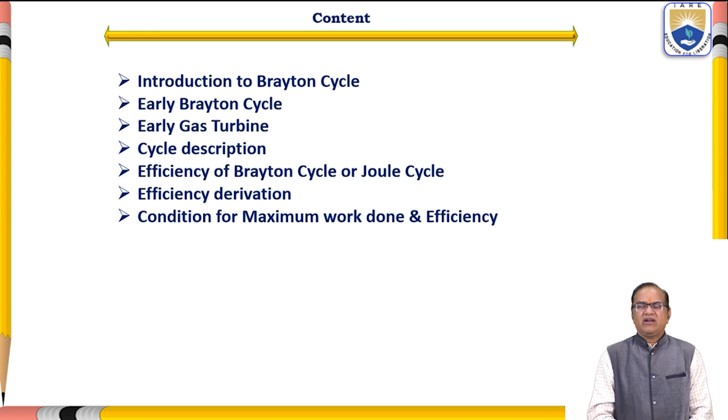Today I will be discussing introduction to Brayton cycle, early Brayton cycle, early gas turbine cycle description, efficiency of the Brayton cycle or the Joule cycle, efficiency derivation, condition for maximum work done, and the efficiency. This I am going to take.

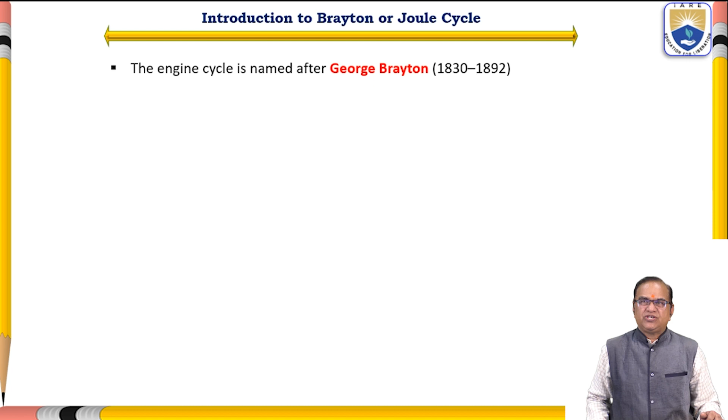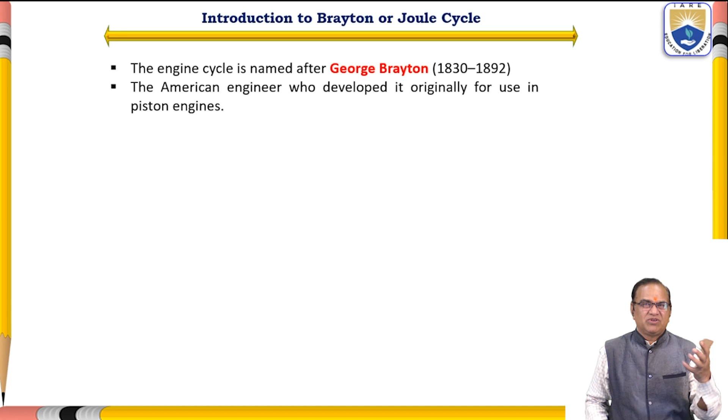In the introduction part, this Brayton cycle is also known as the Joule cycle. The engine cycle is named after George Brayton, whose period was from 1830 to 1892. Brayton was an American engineer who developed it originally for use in piston engines. He made this engine for the piston engine, but afterward it was used for the gas turbine engine because in the piston engine it was not very much of a success.

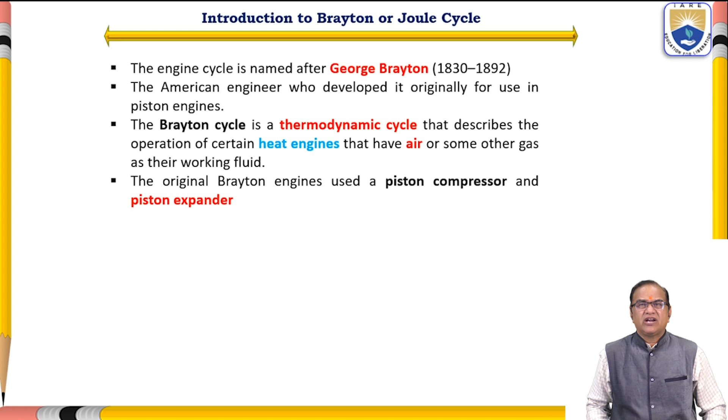The Brayton cycle is a thermodynamic cycle that describes the operation of certain heat engines that have air or some other gas as their working fluid. So we can use air or some other gases as a working fluid inside the piston and cylinder. The original Brayton cycle engines used a piston compressor and piston expander, so we use a separate compressor piston and cylinder, and a separate expander piston. Modern gas turbine engines and air breathing jet engines also follow the Brayton cycle.

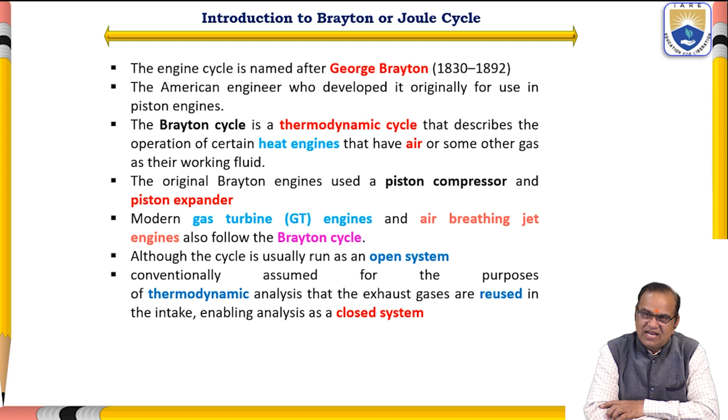We will see in the next slide how the historical development of the gas turbine took place. After Brayton's development of the piston engine, this same cycle was used for the power cycle of power generation, electrical power generation, for turbine engines, for aircraft gas turbine engines, and so on. Although the cycle is usually run as an open system, it is conventionally assumed for the purpose of thermodynamic analysis that the exhaust gases are reused in the intake, enabling analysis as a closed system. So we assume that whatever gases come out after the turbine are again used as input, and so we assume it is a closed cycle. However, in real practice, it is an open cycle.

So here are the early Brayton engines, which were developed by Brayton on these principles. Here you can see the compression system is different, and this is the expander. This is the expander, and this is the compression.

So in this 1872 Brayton gas engine, it is called the Brayton gas engine. Then the Brayton walking beam engine, in 1872 another engine was developed. Brayton engine in 1875, Brayton ready motor it is called. Then Brayton double acting constant pressure engine, all the parts here, how this engine was developed and all the parts of the engine were shown, and it was developed in 1877.

Now in 1889, Brayton 4-stroke air blast engine. Here the air was blasted, with high compressed air used, in 1889. And the next year, the Brayton 4-stroke air blast engine was developed in 1890.

So these are the few piston engines which were developed on the principles of the Brayton engine, and they were not very much successful in automobiles because their size is very big. You can see very big wheels here, all these things, but it can be used for power generation and other stationary work. This I have taken from this reference, from the Wikipedia page of the Brayton cycle.

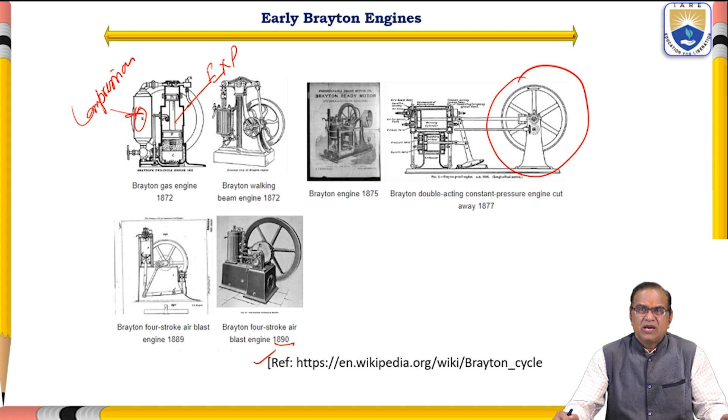Now I will go for the next topic, which is early gas turbine history. This history tells how the gas turbines were developed and how the Brayton cycle was used for modern gas turbine engines.

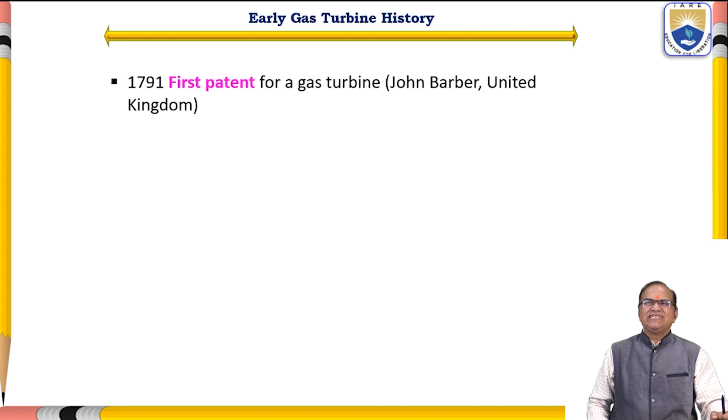So the first patent was filed by John Barber from UK in 1791, the first gas turbine patent. Then in 1904, an unsuccessful gas turbine project by Franz Stolze in Berlin, Germany, made the first axial compressor. It was unsuccessful, but he made the first prototype of an axial flow compressor.

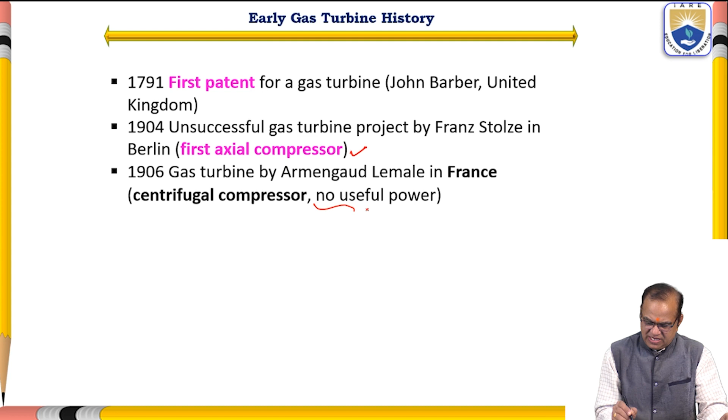Then another type of compressor called the centrifugal compressor. In 1906, a gas turbine was made by Armengaud Lemale in France, using a centrifugal compressor, but no useful power. That was the basic idea, but we could not get useful power in 1906.

Then in 1910, the first gas turbine featuring intermittent combustion, so first gas turbine with intermittent combustion, it was not constant combustion. The person who developed this is Holzwarth, 150 kilowatt constant volume combustion, like Otto combustion, a constant volume combustion was done.

Then in 1923, the first exhaust gas turbochargers were used to increase the power of the diesel engine. A turbocharger is like a turbo engine or gas turbine engine, used not as a separate engine but to increase the efficiency or power of the diesel engine. At high altitude or low density zones we can use this turbocharger, and these turbochargers are nowadays used in costly cars operating at high altitude in India, like Ladakh, Arunachal Pradesh, Jammu Kashmir, and other hilly areas where the altitude is high. To operate vehicles there, we need the turbocharger, which compresses the air before entry into the combustion chamber. That was the purpose of this.

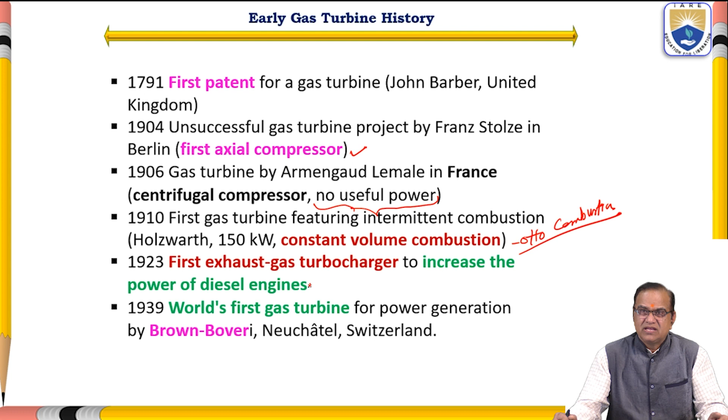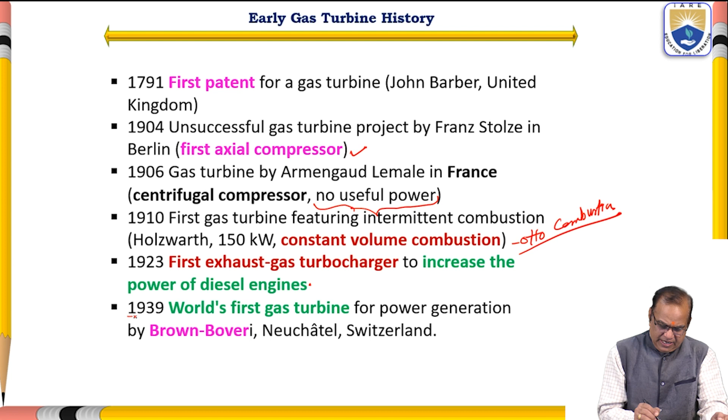Finally, in 1939, the world's first gas turbine for power generation was made by Brown Boveri of Switzerland, in Neuchâtel, Switzerland. This engine was developed in 1939.

Now I will discuss the Brayton cycle description: what are the parts, what are the components, and how this cycle was developed. So here we have first the adiabatic process. The compression is adiabatic, and this adiabatic is also reversible adiabatic, so it is called isentropic process. Next is the isobaric process, so this compression is an isentropic process.

Heat addition is done at isobaric conditions, like in your diesel engine. So at constant pressure we give the fuel and burn it. Heat addition means adding fuel which burns, and after burning the fuel you will get heat addition in the system.

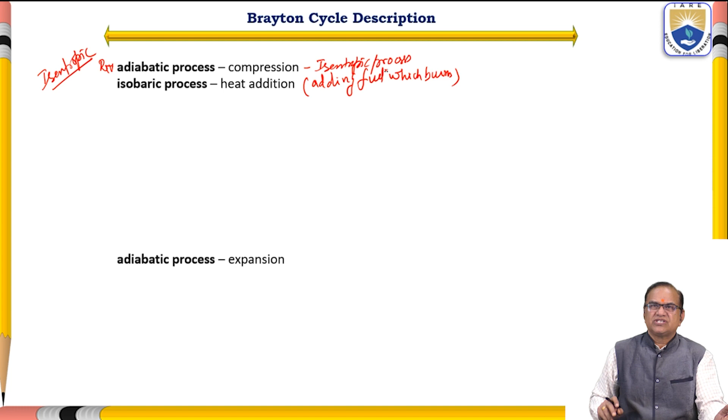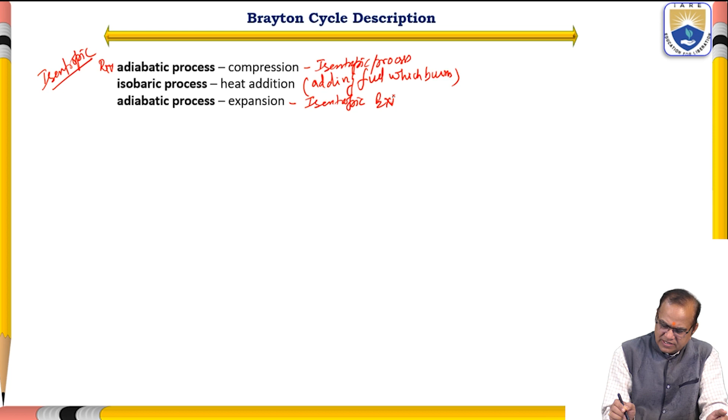Then we have the adiabatic process, that is expansion. This expansion is also isentropic, meaning it is a reversible adiabatic process, not exactly adiabatic, but reversible adiabatic. So expansion of the gases is where work is done, work is produced in this process, while in compression work is absorbed. So in the compression process, work is given, and in the expansion process, work is obtained. That is the difference between these two processes.

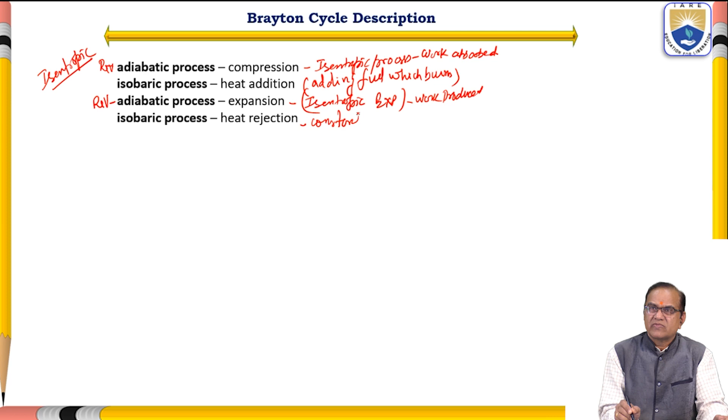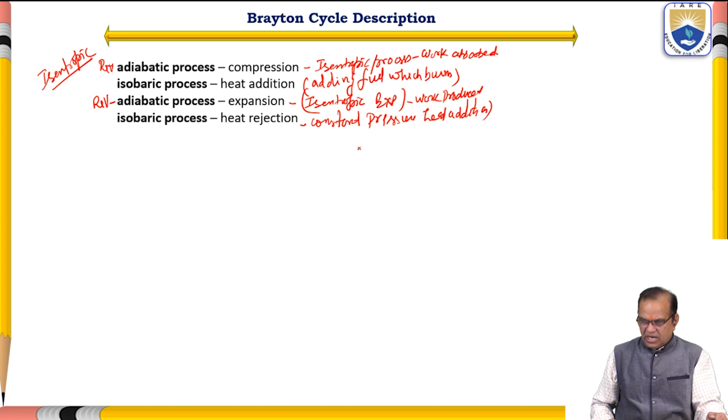And the heat rejection here is isobaric heat rejection, meaning at constant pressure, heat addition is given. Now we have here the diagram. First I will explain the components of the Brayton cycle, and it is a gas turbine engine, so these are the gas turbine engine parts.

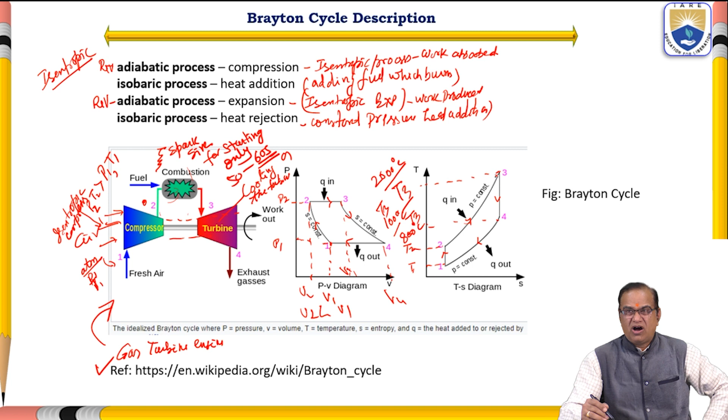So half of this is further lost in heat rejection. Normally in aircraft, this T4 may be 450 to 500 degrees centigrade. It is called the tailpipe temperature, and it has to be maintained within 450 to 500 degrees centigrade. It means at 450 degrees centigrade, the gases are leaving the system. So this point should be this much.

So from 2000 degrees centigrade here to 500 degrees centigrade, 1500 degrees centigrade is used. So the more you have of this value, the more work you will get, because we know the work output is equal to MCp times T3 minus T4. So the less this is and the more this is, the more work output you will get.

But we cannot make T3 as per our choice, because the material is going to fail. So we can reduce this T4 instead. How much are you able to reduce? If in place of 500, you can make it 200 degrees centigrade, then net here I am going to get 1800 degrees centigrade. So 1800 centigrade is used for the development of work.

So these temperatures are very, very important, and we can do some research work on how we can increase this T3 and how we can decrease the T4. As much as you are able to decrease T4, that much efficiency of the engine you are going to get. What are the methods we can use? How can we measure this?

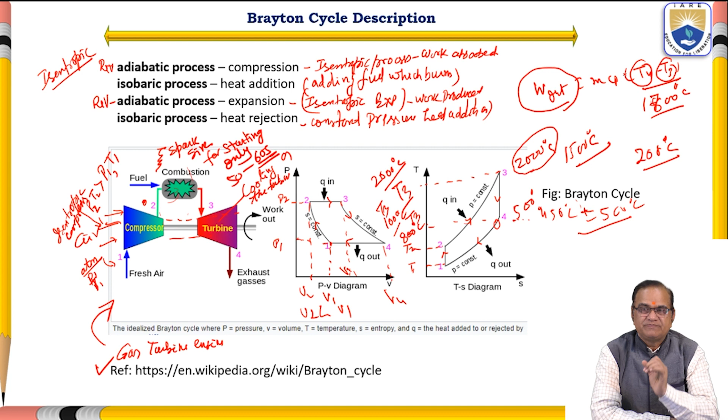Now I will discuss the efficiency of a Brayton or Joule cycle. In a piston engine, an instant high pressure and temperature is observed post ignition.

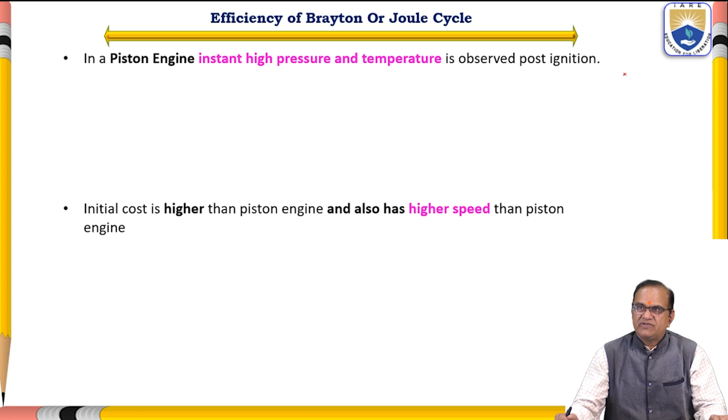In a GT engine, continuous high pressure and temperature persist. This is the difference compared to the piston engine, which has 4 strokes. Out of those 4 strokes, only in 1 stroke is heat added, and only in 1 stroke do you get the power stroke. Out of 4, only 1 takes part in power generation.

But in the gas turbine, it is a continuous process. It doesn't go like this, like this - it is just rotating. So any rotating engine gives a continuous process, and in that continuous process, continuous heat is present. In the piston engine, out of 4 strokes, only once do you get heat, and the remaining 3 are just cooling, so you can work nicely with high temperature. But in the turbine, it is not possible.

So for the same temperature as a piston engine burning inside the combustion chamber, we cannot use the same materials for our turbines, because turbines are always under the same pressure and the rotation is very high. So centrifugal forces and different types of forces are acting, and the material will melt very fast because a continuous sustained temperature is present.

This cycle represents a steady state flow process or a control volume process. So in this turbine, or in the Brayton cycle, it is a steady state flow process, not a control mass system - a control volume system is considered.

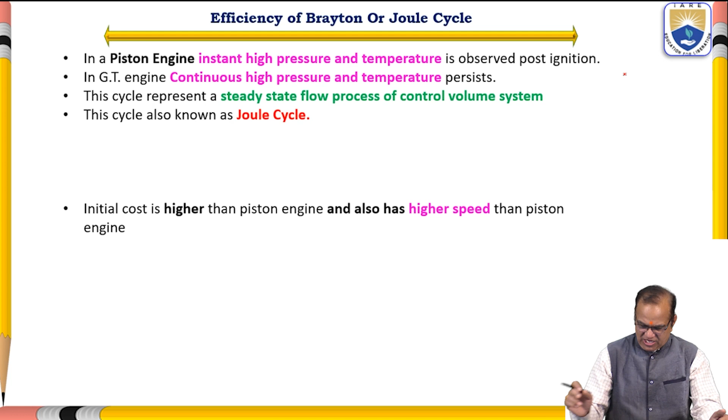This cycle is also known as the Joule cycle, and the practical application is in the gas turbine engine, or GT engine. Mostly these are external combustion engines. External combustion engines are only for power plants, not for aircraft.

For aircraft, we have the internal combustion engine, so it is not for everything. Only for power plants do we use the external combustion engine, where we can burn anything and the burned gases are used inside the turbine. In this, the heat source is outside the combustion cycle - only for the power plant, not for all. In aircraft, we don't use external combustion; it is an internal combustion engine.

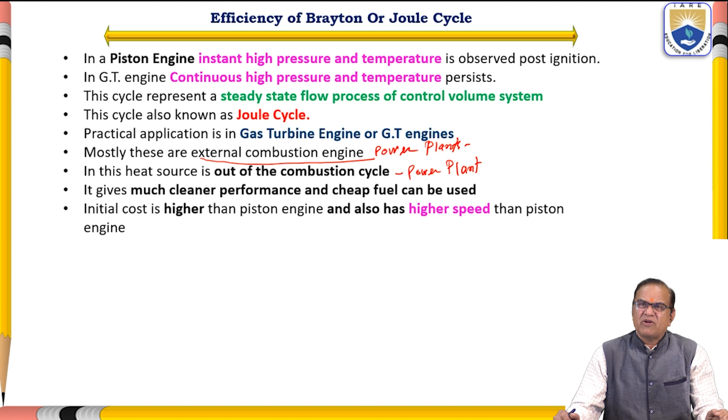It gives much cleaner performance and cheap fuel can be used. Much better performance, and the atmosphere also stays very clean. Burnt gases released are very less, and any cheap fuel can be used.

Like in aircraft, we use ATF - aviation turbine fuel, kerosene. This kerosene is used. Kerosene is low cost compared to petrol and others - the cost of kerosene is sufficiently low.

Initial cost is higher than the piston engine and it also has higher speed than the piston engine. So the initial cost of this gas turbine engine is much higher than the piston engine, and also the speed of these engines is very high. So it is not suitable - it is used for ships and aircraft, but not for ground vehicles due to its high speed. As of now, we are not using it for ground vehicles.

But in the near future, you will see that gas turbines are also used for ground vehicles, as and when the roads are built in a nice way. And from a long time, we have been using them in ships and aircraft. Most ships are operated by turbo engines.

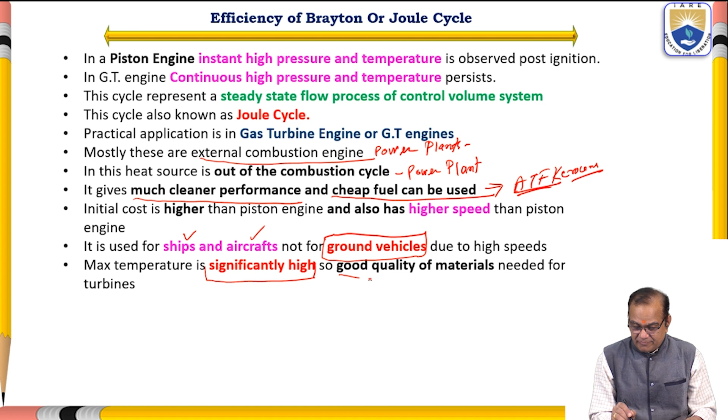Maximum temperature is significantly high - this is a disadvantage because the maximum temperature is very high, so good quality materials are needed, very high quality materials. Normal steel will immediately melt at 1300, 1400 degrees centigrade, but the temperature goes to 1800, 1900, 2000. So we have to make some alloy materials like tungsten or some titanium alloys.

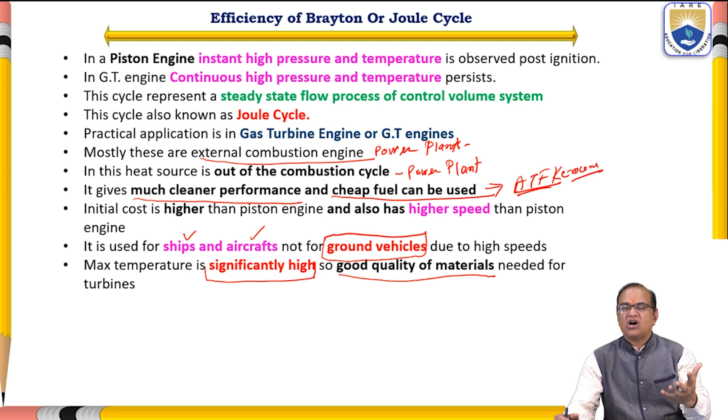We have to mix it, then we have to make the material, so the cost of this material is also going to be very high. The engine is much bulkier than the piston engine, so the size of the engine is also more than the piston engine. So these types of engines are not suitable for automobiles as of now.

In future, this may be possible. You people can think of some new ideas and use this in your ground vehicle. One of my friends recently got an award from the Defense Minister, Sri Rajnath Singh, for a micro gas turbine engine. So anyone, if you are interested, I can share the video for that micro gas turbine engine.

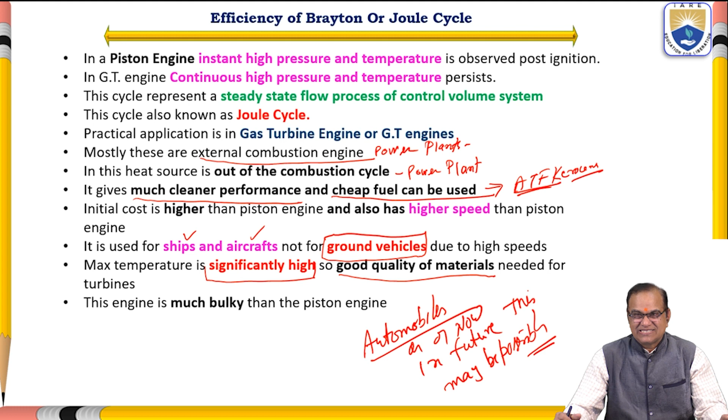So we will see here the efficiency and how we can derive the efficiency of this cycle. Same way as I have shown in my previous one.

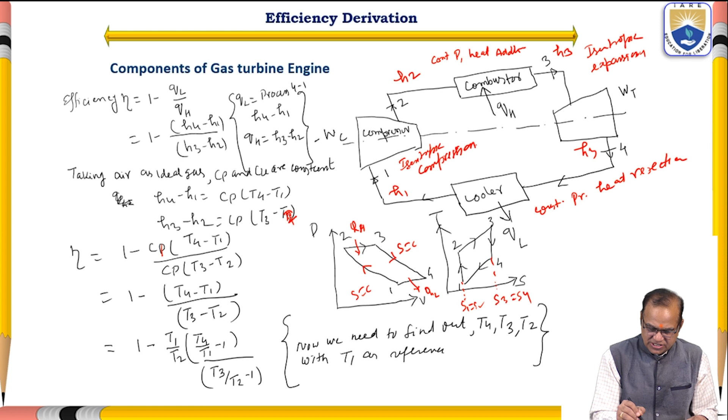this denominator, H3 minus H2 is equal to Cp times T3 minus T2. So now we can write eta is equal to 1 minus Cp times T4 minus T1 divided by Cp times T3 minus T2. So 1 minus Cp we have taken out, giving T4 minus T1 divided by T3 minus T2.

So here we have all the temperatures, T1, T2, T3 and T4, all 4 points are here. So to find out the efficiency of any cycle, we need all the state points of the cycle.

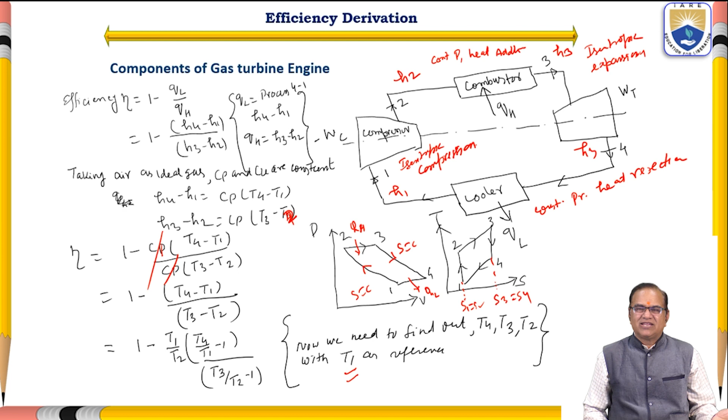So now, in the numerator we have taken T1 as a common, giving T4 by T1 minus 1. And in the denominator we have taken T2 as common, giving T3 by T2 minus 1. So now we have to find out the relation between T4 by T1 and T3 by T2, and for that we have to find T2, T3, T4 with respect to T1, as we have done in earlier derivations of the Otto cycle, diesel cycle and dual cycle.

Now, taking process 1-2 as isentropic compression, we know the relation between isentropic compression is T2 by T1 is equal to P2 by P1 to the power gamma minus 1 by gamma. And here P2 by P1 is equal to Rp, the pressure ratio. So we get T2 by T1 is equal to Rp to the power gamma minus 1 by gamma, putting Rp for P2 by P1.

Now we will take the isentropic expansion, process 3 to 4. So T3 by T4 is equal to P3 by P4 to the power gamma minus 1 by gamma, and P3 is equal to P2 and P4 is equal to P1 for the constant pressure processes. So P2 by P1 to the power gamma minus 1 by gamma, and P2 by P1 is the pressure ratio Rp, so we can write it as Rp to the power gamma minus 1 by gamma.

Okay, so here we got equation 1 and equation 2, and the right hand side of this is equal to this. So we can write T2 by T1 is equal to T3 by T4. Further, if you see here, we have to find T4 by T1, so this 4 I have to bring here. So T4 by T1 is equal to T3 by T2. So this T4 by T1 and T3 by T2 both are same.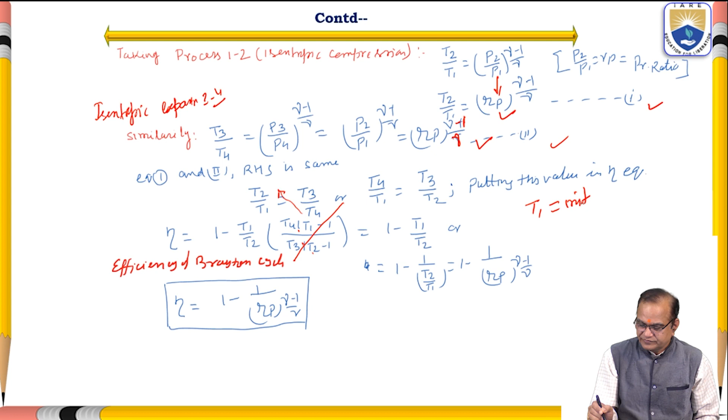This is cancelled, so here you will get efficiency equal to 1 minus T1 by T2. So the efficiency depends upon two temperatures, not the highest temperature, but T1, the initial temperature, and T2, the temperature after compression. Very, very important. It means how much fuel you are burning does not matter; how much compression you are giving is what gives you the efficiency. That is the result which we can analyze from this equation. So we got here 1 minus T1 by T2.

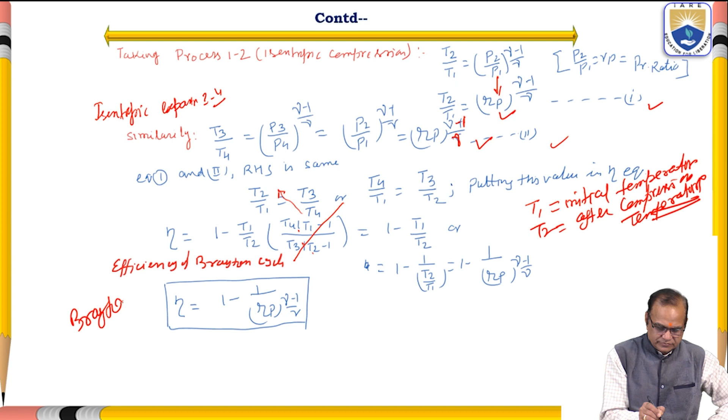So here T2 by T1 is equal to Rp to the power gamma minus 1 by gamma. So T1 by T2 is equal to 1 by Rp to the power gamma minus 1 by gamma. So 1 minus 1 by T2 by T1 equals 1 minus 1 by Rp to the power gamma minus 1 by gamma. So the efficiency of the Brayton cycle, eta, is equal to 1 minus 1 by Rp to the power gamma minus 1 by gamma, and this gamma for air we take as 1.4, or it may be given in your problem.

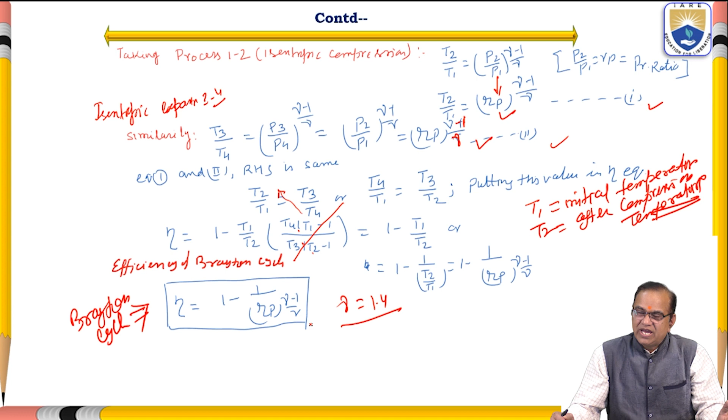This Rp is the pressure ratio from compression, which is P2 divided by P1. I hope you all have understood this problem very well.

Now we have to see the condition for maximum work done by the Brayton cycle, meaning how much maximum work we can obtain with the help of the Brayton cycle. We need the expression for maximum work done when the maximum and minimum temperatures, T3 and T1, are given.

We know that work done is equal to QH minus QL. W net is equal to Cp(T3 minus T2) minus Cp(T4 minus T1). Here Cp: T3 minus T2 is equal to T1 Rp to the power (gamma minus 1 by gamma) minus Cp, and for T4 we have got that it is T3 by Rp to the power (gamma minus 1) minus T1.

Now we will take Cp common, and take the T3 terms together. So T3 is common, giving 1 minus 1 by Rp to the power (gamma minus 1 by gamma), times Cp. Then we take T1 here and here, giving minus Cp T1 times Rp to the power (gamma minus 1) minus 1. This is the equation we got.

Now we will put Rp to the power (gamma minus 1 by gamma) as x, and then differentiate this equation with respect to x and set it to 0 for the maximum. To have the maxima, dW net divided by dx is equal to 0.

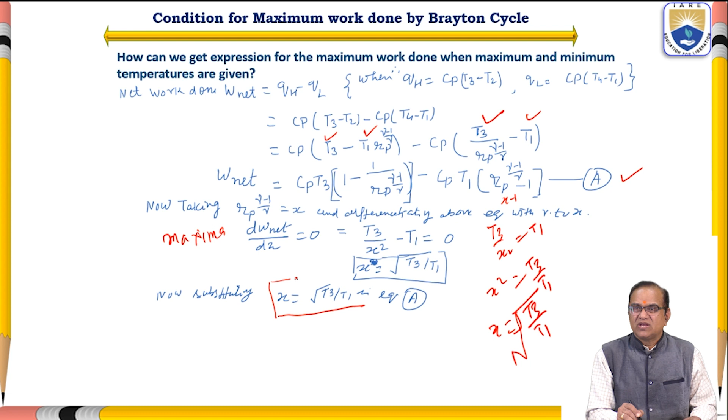Now we will find out how much work is required. We know that W net is equal to Cp T3 (1 minus under root T1 by T3) minus Cp T1 (under root T3 by T1 minus 1). It is 1 by, so it is under root T1 by T3.

So here we get Cp(T3 minus 2 under root T1 T3 plus T1), and this whole thing is under root T3 minus under root T1, whole square. So here you will get T3 minus 2 under root T1 T3 plus T1.

In place of this, we are putting this value, so we get W net is equal to Cp (under root T3 minus under root T1) whole square, for maximum net work.

Eta maximum is equal to 1 minus 1 by Rp to the power (gamma minus 1 by gamma). This Rp is equal to x, which we have already assumed. So 1 minus 1 by x is equal to 1 minus under root T1 by T3. So maximum efficiency is 1 minus under root T1 by T3.

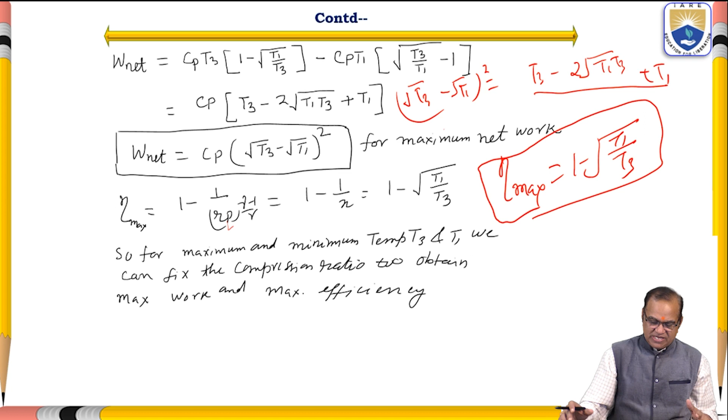So if the maximum efficiency is given in the question, this is the equation you will get. The cycle should not give more than this value; if it does, there is some problem in the system. So for the maximum and minimum temperatures, T3 and T1, we can fix the compression ratio for maximum work and maximum efficiency. In the next class, we will discuss some numerical problems on the Brayton cycle.